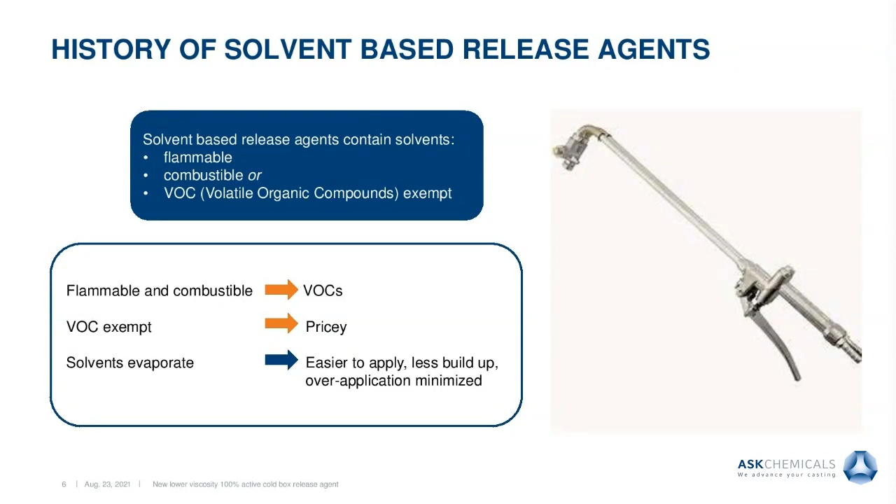In the 1800s, chlorinated solvents were first produced in Germany. In the United States, they were widely used after World War II. A massive amount of chlorinated solvents were produced in the U.S. between 1940 and 1980, amounting to 2 billion pounds.

Unfortunately, chlorinated solvents contain many disadvantages, including volatile organic compounds, carcinogens, ozone depletion, and toxicity to aquatic organisms. To that end, chlorinated solvents have since been removed from foundry solvent-based release agents.

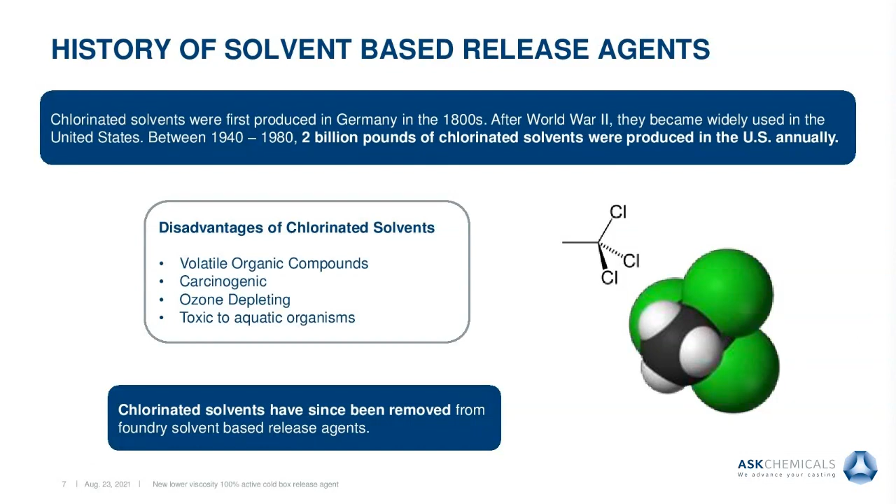Hence, the introduction of water-based release agents. They don't come without their fair share of disadvantages as well. The water may rust metal tooling. The water also reacts with the isocyanates in the cold box resin part 2s, which will lead to resin wipe-off. We don't recommend water-based release agents for cold box applications, although some customers are using them.

Their biggest advantage, however, is that they typically contain lower amounts of VOCs compared to their solvent-based counterparts.

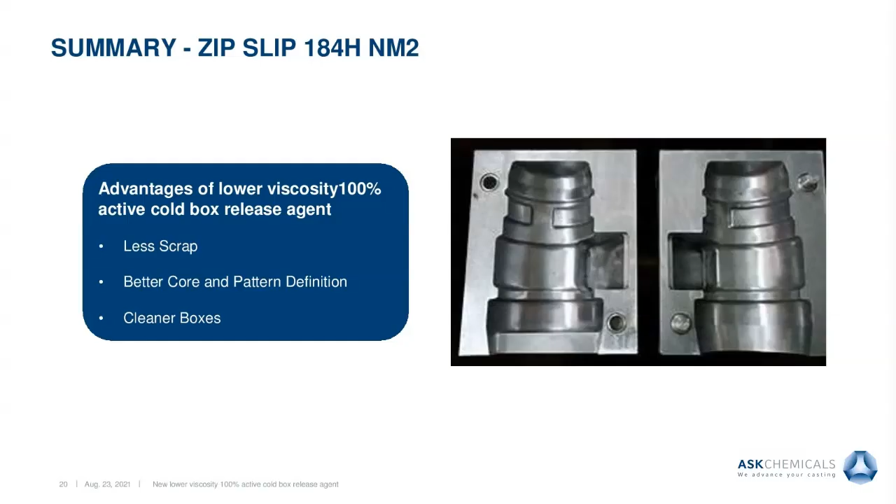Does the 100% active release agent come supplied in aerosol cans? At this time, it does not. You can buy spray equipment, or you can purchase a can. Particularly Harbor Freight has spray equipment typically used for automotive painting that has smaller tips—we recommend 20 to 30 thou

for the 100% active release agent so that you don't over apply it. Typically with a solvent-based or water-based release agent, you might be able to get away with a larger tip size. But with the 100% active release agents, you want to use a smaller tip to help prevent over applying it.